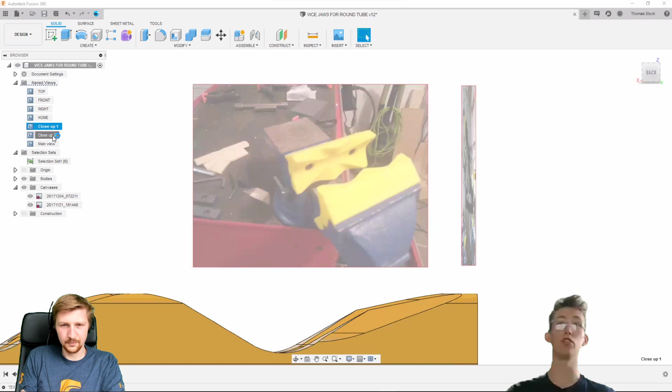The part I want to take you through the workflow with is this soft jaw that can be printed. It goes in some sort of clamp or vise, and is used to hold bike frames by a bike shop if they want to loosen bolts or make edits to the bike frame. What's great about printing jaws like this is you can print them quickly for a certain custom bike frame, or print them to hold many different bike frames. If you're worried the clamp itself might damage the bike frame, you can print these and it will hold it in a much better state, also stopping damage to the frame. So that's the part.

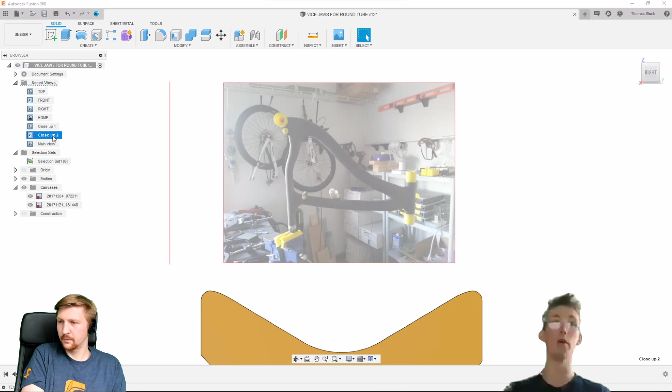I'll jump straight into it. I'll hide the canvases now that you know what the part is. To start the Fusion FFF workflow, we have to jump inside the manufacture workspace, so we go up to design and click manufacture, and now we're in the manufacture workspace.

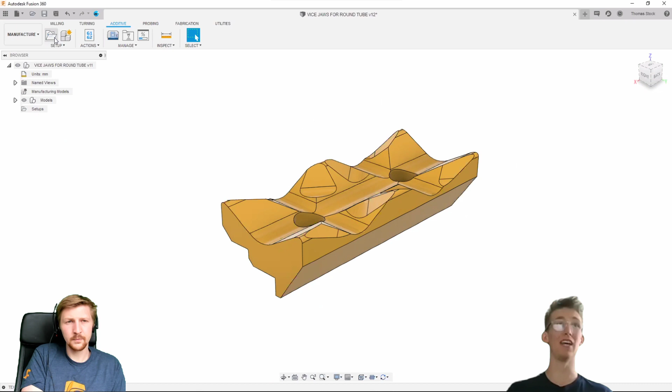The first step is always to create a setup, so we'll go to the top left and create a setup. This is important because in this setup we'll select a machine, and we'll be selecting our operation type, for example whether it's milling or additive. So we're going to select additive, go to our machine and click select. You can see within the Fusion 360 library we have a large range of machines.

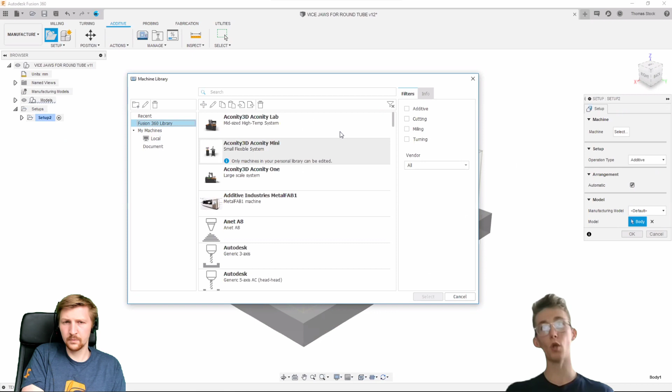We're going to set the filter to additive, and the machine we're going to use today is the Ultimaker 2 Extended.

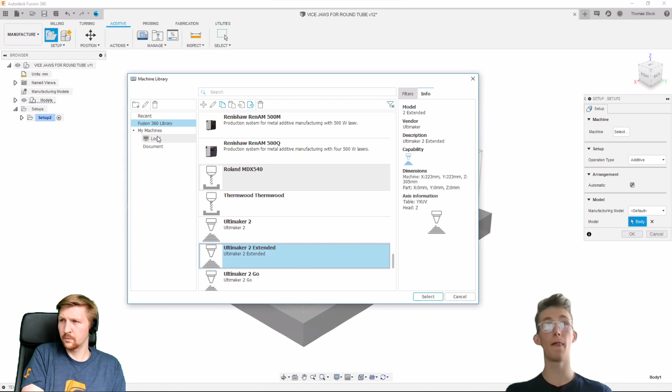We can do a couple of things with this. We can drag it to our local library, and now if we go in, you can see the machine there. Compared to another machine that's in there, we've not got a post associated with that machine, and we've not got print settings associated with it yet.

For those not familiar with what post is, it's short for post processor, and it converts your on-screen toolpath into machine-readable code. Every machine needs a post for it, and its post is unique to each machine.

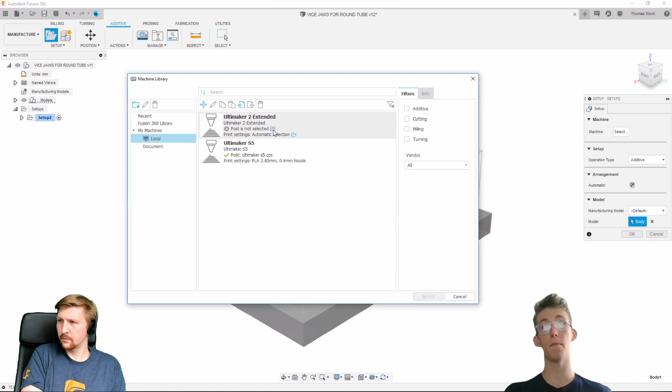So for this machine, we'll need to select post. We can click on the little folder icon here, and it'll take us to this window, and from here we can look at the Fusion 360 post library. Again, we'll set the filter to additive, and we'll select the Ultimaker 2 FFF machine post. Fantastic, so you can see we've got our Ultimaker 2 machine there with the post selected.

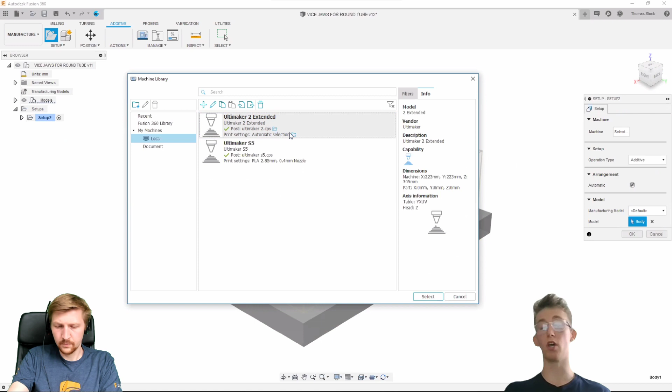We can also select print settings in the same way. I'll click select on there. As you can see, it's imported the build volume into the workspace, and it's selected the part and automatically selected print settings. What we're going to do is reselect some print settings that I've created for this job today.

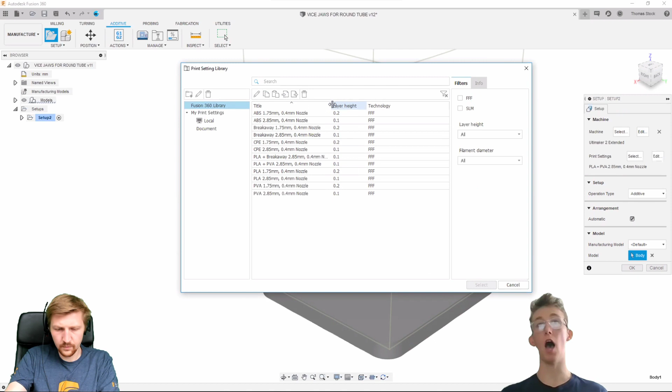We'll click select, and it'll bring up the Fusion 360 print setting library. What I'll actually do is go into my local library, where I've created these settings, called Tom settings. If we go back into the Fusion 360 library and select one of these print settings, you can see they're often sorted by material, filament diameter, nozzle diameter, and layer height. You can click on one and see the information associated with that print setting.

But anyway, we'll go back into our local library and select Tom settings, which is the one we want to use. Again, you can see the information for those settings here, and we can click select. Fantastic, so we've got our part, our machine, our post, and our print settings.

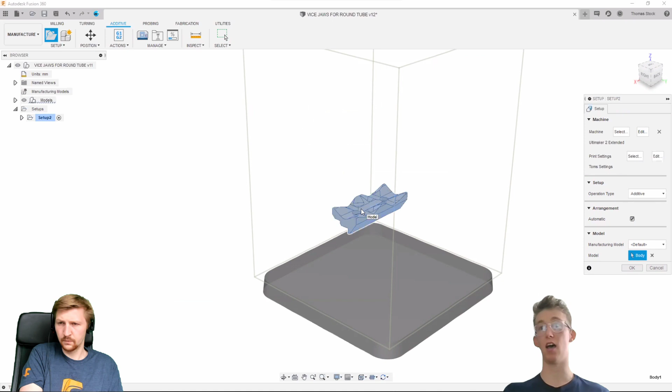We're now pretty much ready to click OK and finish with this setup. Note that we've got arrangement set to automatic and the body's already been selected, so when we click OK, it's going to move the body right to the center of the platform. And you can see that it's created the setup in the tree here.

The next stage is to look at this part and think about what position and orientation we're going to print it in. So we're going to go to the Position tab in the ribbon, where we see some of the options we've got: we can move the component, minimize the build height, use automatic orientation, which I'll show you, and also place parts on platform. We've also got collision detection for when we have multiple parts on a platform. So I'm going to show you guys automatic orientation today.

So there we go, it's opened a little dialog on the right here. The first thing we need to do is select our orientation target, which of course is our part. So I'll click on our part. We can see the critical angle is set to 45 degrees, which is standard for FFF technology.

It says support bottom surface - distance to platform, which of course we'll set to 0 because we want the part positioned right on the platform to ensure good first layer adhesion for a successful print. So smallest rotation, we'll leave at 45, and rotation axis arbitrary, that's fine.

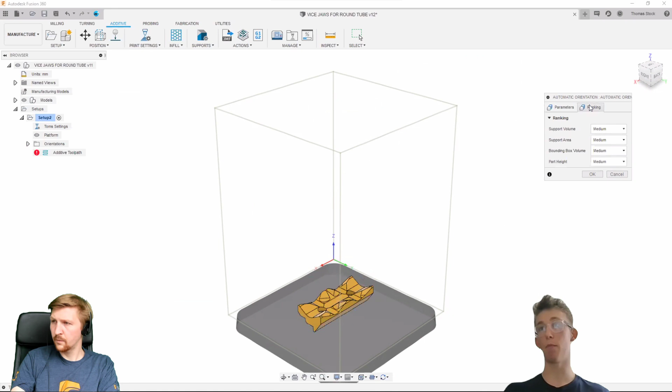We then go to this ranking tab, where we can see certain orientation parameters we can set different priorities on. This tool is going to generate a set of orientations for us. For example, if we wanted to set part height as a top priority for reduction, we can set this as very high, and so the orientations it suggests will overall have lower part height.

So Tom, why would I want a low part height? Yeah, good question.

For a lot of manufacturing processes, the part height is directly proportional to the overall build time. With FFF, it's less so, but if you wanted to save on material costs and build time, you'd want a low part height. We'll just leave all of those as medium and see what orientation results it generates for us. So I'm going to click OK.

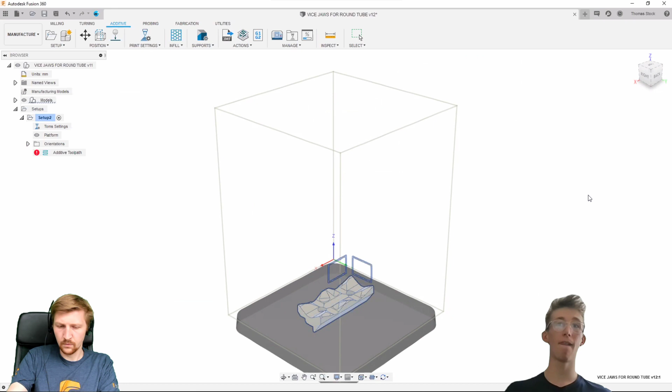You'll see on the left in the tree, it's created this automatic orientation folder. We're going to right click on it. We can always edit the settings we just entered, but we're going to go to orientation results and see what it suggests for us.

So you can see the rank. Initial is the position it's in at the moment, and we can go to any number of these. Let's go to number 10, for example, and it suggested a certain orientation. A lot of you will be looking at that thinking that's probably not the ideal orientation, and you're probably right. You've got different relative orientation settings with some values, which is also very useful. But what it usually does is put the best or most favorable orientations at the top.

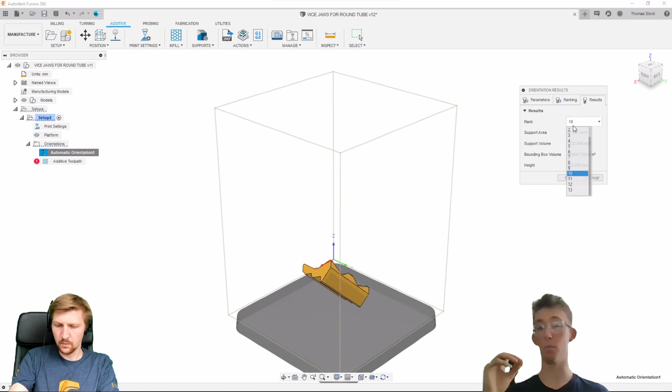So we'll just go to 6. Okay, that's looking a bit better. But if we go to 1, we can see that's probably the best orientation for this part. So yeah, I think we're happy with it. So we're going to click OK. Fantastic, so that's orientation done.

Next, we want to make changes to the print settings. So what we can do is go to the next icon in the ribbon, which is the print setting editor. We can click on that, or we have the option to click on...

I'll select some print settings within the setup. Give me one second for Fusion.

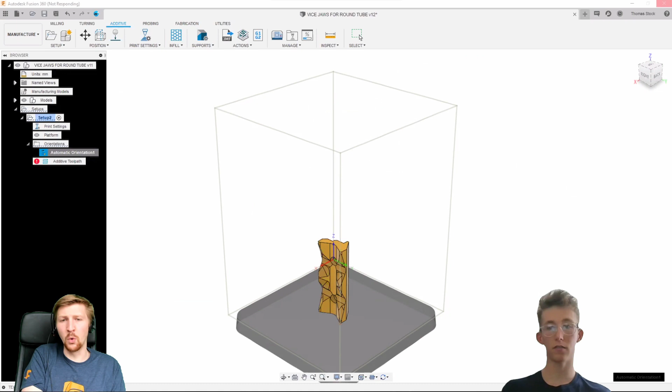So we've got some interesting questions in already here. Some people are asking what kind of printers. We've just been saying this is mainly for FFF, but what other types of 3D printers have we got? Because there are some other types, aren't there? Yeah, so at the moment we're just working with FFF printers. There are a lot of metal powder bed machines within Fusion as well, and also there's talk of bringing another type of additive machine into Fusion. But yeah, I'm just going to pass on to Richard for a second.

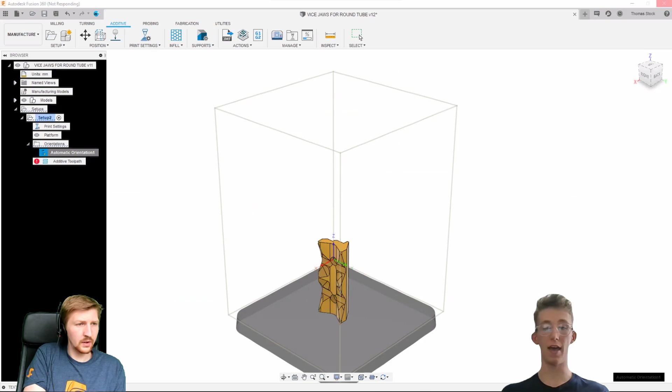Yeah, that's absolutely fine, stop the share. Cool, so just so everyone knows, Tom's having something he just needs to quickly sort out there. Yeah, so thanks for the questions everyone, we're just quickly sorting out. Tom's just sorting out what he needs to do on his end.

So yes, there are quite a few different types of printers at the moment. All we are talking about supporting is FFF, Fused Filament Fabrication. This is probably what a lot of you are used to. You have a spool of filament that gets fed through a set of rollers, pushed through a nozzle, and that starts making your part. We have talked about some powder bed machines as well, so Fusion can cope with powder bed machines. This is much more of your commercial type machines, for your industrial machines making components out of metal.

So how do those actually work with a powder bed? Is it a bed that's then laser sintered? Yeah, exactly, or melted. We have both in Fusion, and I've worked a bit with them myself and used Fusion to create and print parts. It's done a really good job.

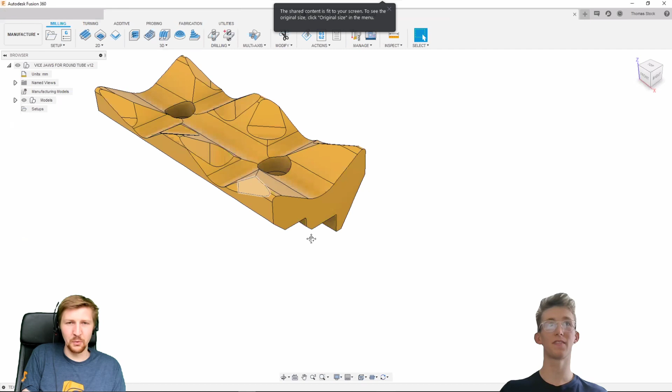So anyway, I'll just bring you guys back to where we are. Apologies for that, I'll just reshare my screen. No worries Tom, it's the whole point of us doing these things live. Not everything goes perfect, but everyone on the call does appreciate that. We're trying to do this in time, live with what everyone else is seeing, rather than spending a month doing a polished video.

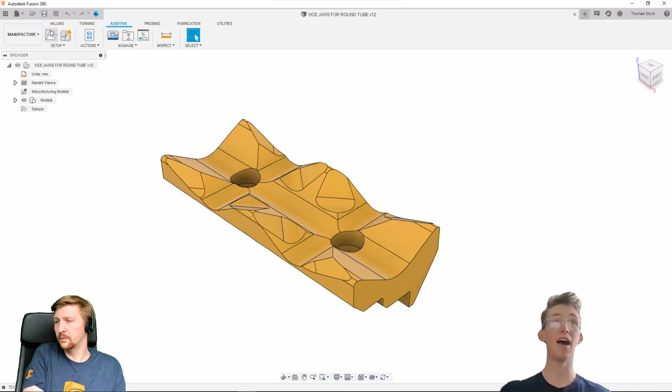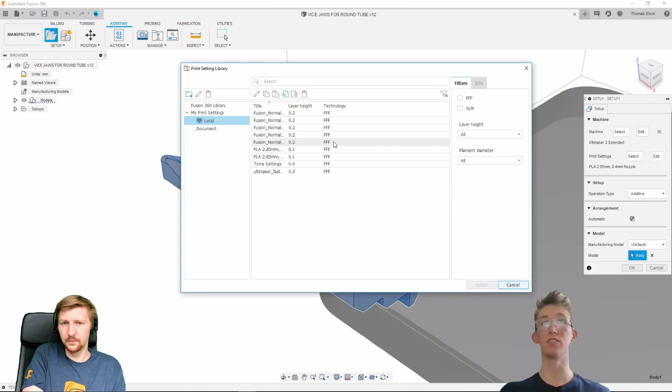Yeah, there were some questions about changing machines and changing posts, but we are going to cover that as we go on. There's a really cool add-in, or is it an app? It's a great add-in that I'll show you guys. You can download it. It was released about a week ago, and you can use it for creating your own post, but I can talk on that more later.

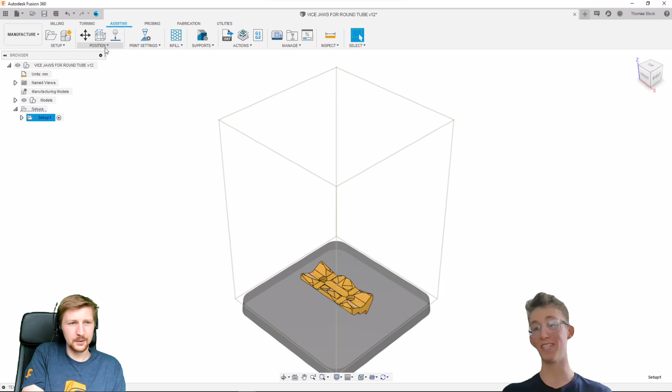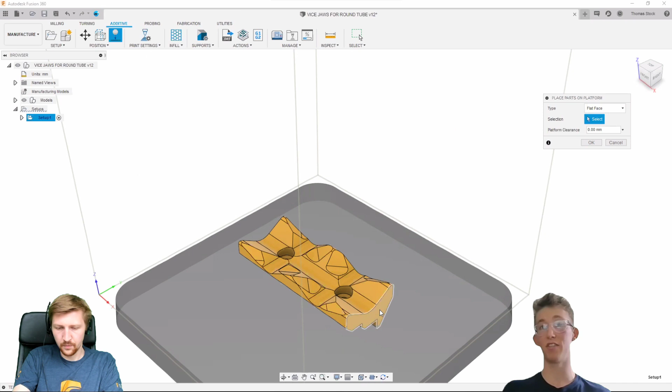So we're back, apologies for that. This gives me an opportunity to show you another different type of orientation for the part. So every cloud - I showed you the automatic orientation tool. One that I actually use quite a lot is this place parts on platform tool. Quite a few slicers have a similar tool. You can just select the part and select the platform clearance, or you have the option to select a particular face. So if I was looking at this part, I probably, and many of you as well, might not need an automatic orientation tool to suggest what orientation to use. So we can just select a face. Actually having run the orientation tool and it suggested this orientation was best, I'd agree with it. So there we go, it's positioned the part.

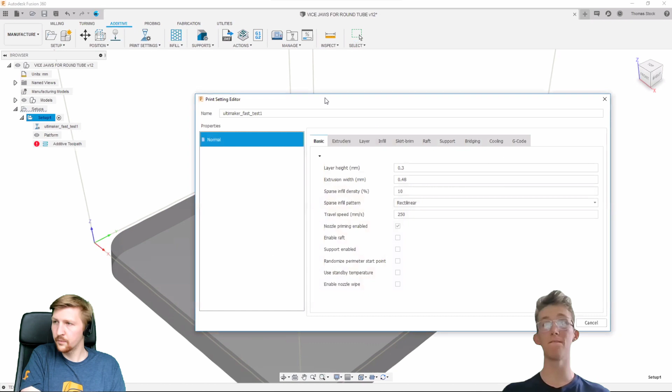Now we can jump back in right where we were before. We've got our print setup here, our print settings. We've selected our machine, so we can go to the print settings editor, and we can see that we've got a range of tabs, and under each tab we've got different print settings. We've got a basic tab - this is kind of for people who may be new to FFF, and we've put print settings that we saw as key or most useful for those people into one tab. We've also got an extruders tab, a layer tab, an infill tab, etc. Each of these have a range of different settings underneath that allow you to customize how you want your part to be printed.

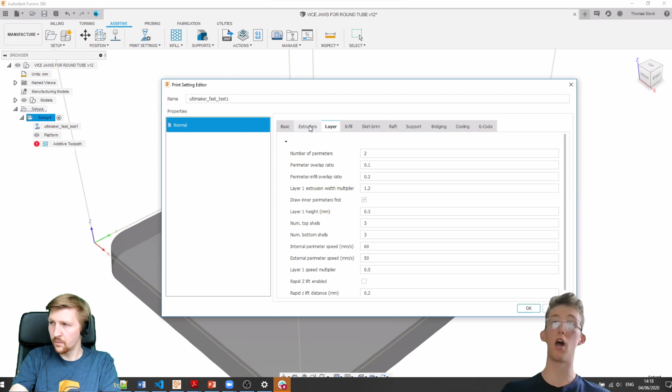So we go to raft, support. Of course, we're using a dual extrusion machine with the Ultimaker 2. We can select this support extruder ID for extruder 2, telling it that we want to use extruder 2 as the support material, but for this case we'll just use extruder 1. You can see the range of settings. Is there anything I'd want to change about this build? I think no, I think we'll keep it as that. So I'll click OK. I will enable support - we've got those holes for attachment to the device, and when those holes are printed I'll probably need a little bit of support. So I'll click OK.

Fantastic. So you can see on the left in the tree, setup, print setting selected. We can hide our platform if we want, and now we can see that our additive toolpath is ready to be generated - it says there's no toolpath yet. So we can either generate it from the tree, or we can go up to actions and click generate. It shouldn't take too long, being a relatively simple part.

So we've selected the machine, selected the post, selected the print settings, made edits to the print settings. We've chosen the orientation, we've made edits. We've made sure that we're using support for those holes, and now we're generating the toolpath, and we see that it's just finished. So brilliant, we've generated a toolpath.

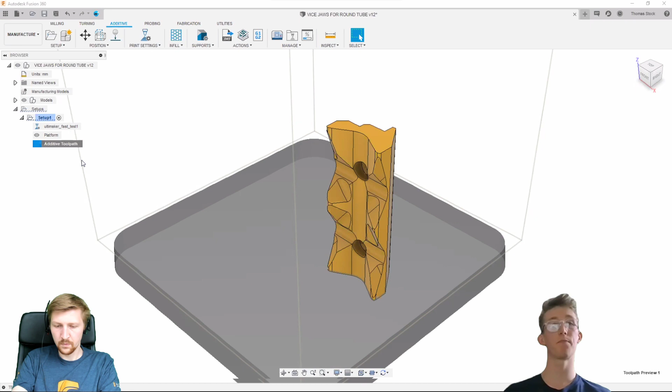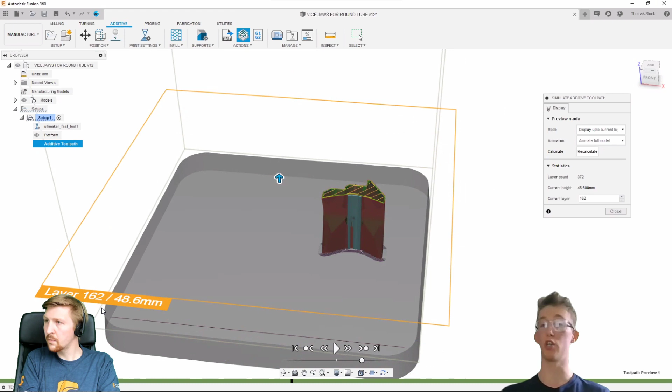We can now go in and simulate it. Just give it a second for the simulation to open up. Fantastic, so here we go - you can see that it's the first layer, and what we can do is drag this little arrow and move up through the part to see the toolpath simulation. You can see on the bottom left this orange square which shows the layer, and you've got the layer and the part height as well. So we can zoom in and see the toolpath.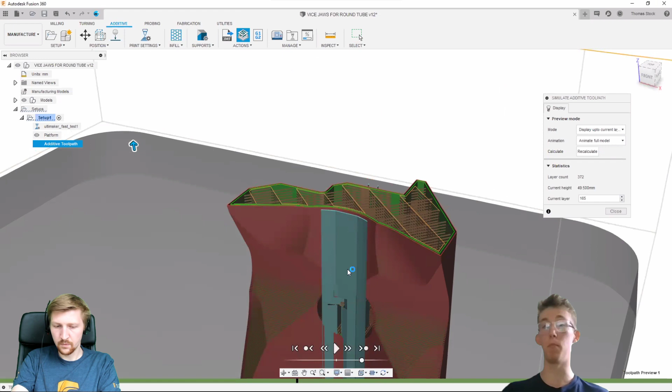You can see that the way this has been color coded: the outer perimeter is red, the inner perimeters are green, and the infill is orange. You can also notice that the support material is shown in blue. So we can move up through the part, and you can see actually that for these bolt holes, it's actually going to need to use quite a bit of support. And then you can see the top layer there.

If we wanted to, we could just display the current layer and zoom in on that, for example, and check everything's looking okay. We can also click animate layer only to play through it. I'm just going to slow it down so we can play through that layer. Okay, it's done it very quickly.

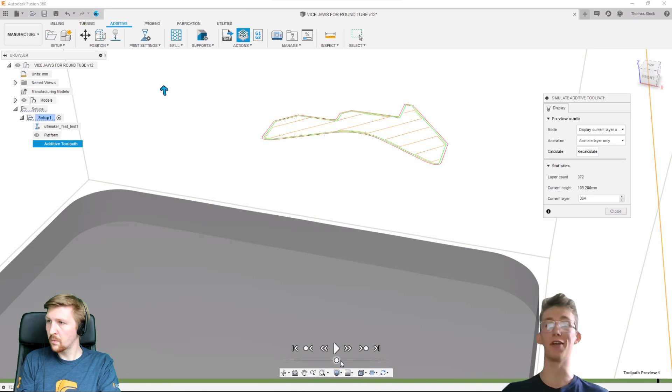So let's play through that again a bit slower. There we go, fantastic. So if we want to see exactly how it's going to print that layer, we can do that via the simulation tool here. I think we're all happy with that.

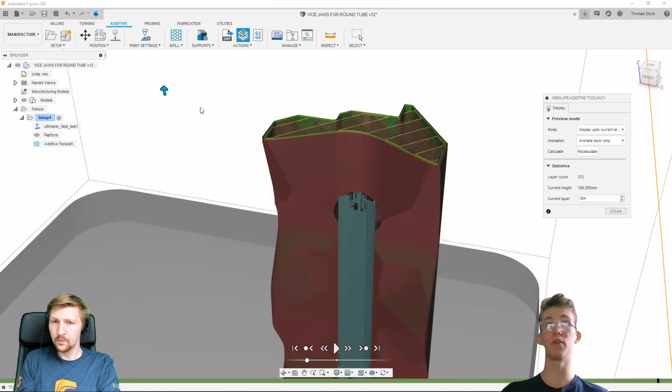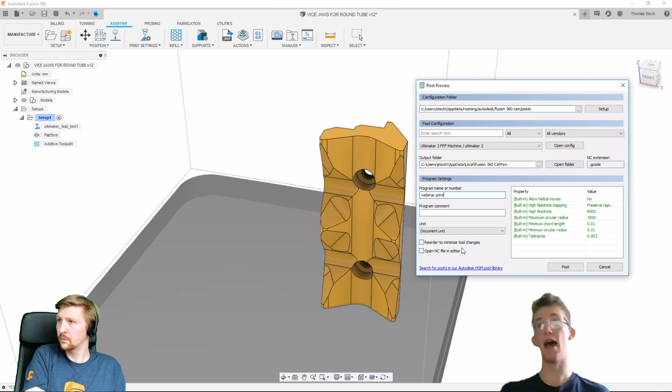So we're going to click close. Now the next step is to post-process our toolpath. Again, we can go to actions and click post-process. You can see the post configuration is already selected, since we chose that during setup. We can go down to program name or number, so we're going to call this webinar print today, and click post. We'll open the desktop or another folder, save it to our desktop, and click save.

Okay, so assuming that's processed, I'll open it for you guys. Just while that's opening, Tom, an interesting one that I've never heard of before.

Someone's asked about a Delta Wasp machine with a clay extruder. Have you ever heard of one of those before? I've heard of the Delta machine. There's four main types of 3D printing machines, or FFF machines: you've got Cartesian, which is the one we're looking at now, the usual Cartesian axis machine; you've got your Delta; and you've got your robotic arm, or Scara as it's called, and Polar might be to do with the robotic arm too. I haven't come across that exact printer, but a project my team actually worked on was also clay printing and clay milling. We did this with Kolb, using a robotic arm. Didn't use a Delta printer, but that's very interesting.

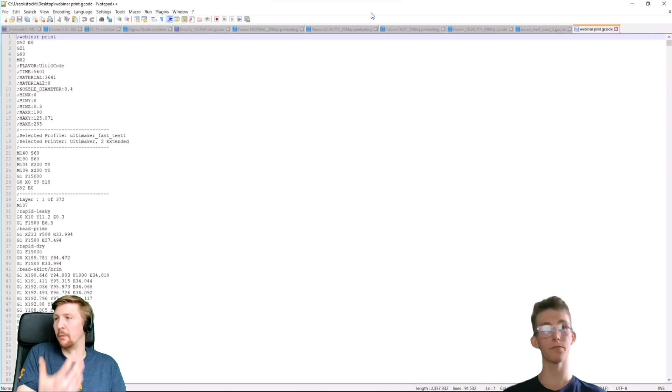Okay, so the Delta stuff isn't supported in what we've currently got. No, but it's good to know - I like to be quite honest about what we can and can't do. But everyone, bear in mind all the feedback you post. Me and Tom speak to the product managers quite a lot, so these things will come up. Oh yeah, we've had a couple of people ask for that. So please let us know what you want to see.

One thing I'll just give you a heads up on, Tom - someone's asked, he's got a local printer and he's asking how he can add that. Is that something we can have a quick look at before this is out? Yeah, sure, I guess he means he's got his own machine and wants to add that to Fusion. That's brilliant - we're going to touch on that at the end of this presentation.

And my last interruption, I promise - someone's asked, is it possible to do tree supports? Good question. So in the FFF workspace, no. The control you have over supports at the moment is quite limited. You've got the standard FFF support and you can change certain parameters, but it's got a set shape and you haven't got much control compared to other slicers over the support structure. There is tree support within Fusion, but with the metal powder bed, not with the FFF side, so we've just got standard automatic generated support.

Brilliant, Tom, superb answer there, really appreciate you going off topic for that. Thanks for the question, guys. I'll crack on. So as you can see, we generated our G-code - I won't go through this because it's not particularly interesting. But what we can do now is save that to a USB, put it into our printer, and print. Now, assuming we print this part and realize the prototype printed awfully because of these holes, and you want to remove these holes and reprint the part - well, this is what's great about Fusion.

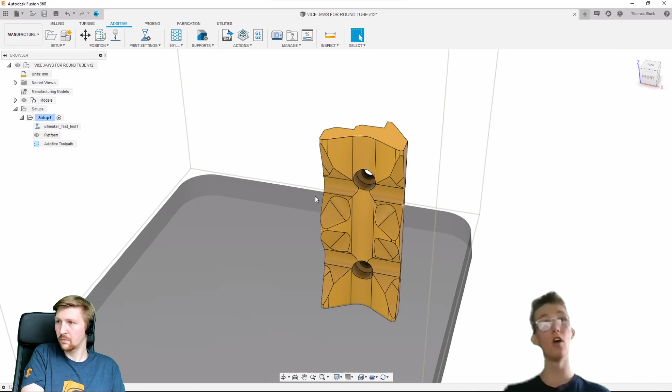So what we can do, we can just go back in the Design Workspace, see a part. We can just select these holes, click delete. Okay, the hole's been deleted from the part.

You go back into the manufacturing workspace, and all we have to do is just regenerate the toolpath. So we've made a pretty substantial design change to this part, and we don't have to do any more setup. We don't have to reselect the print settings or change them in any way, reselect the machine or the post, or even the orientation. It's all kind of been saved, and as you can see, the toolpath is generated.

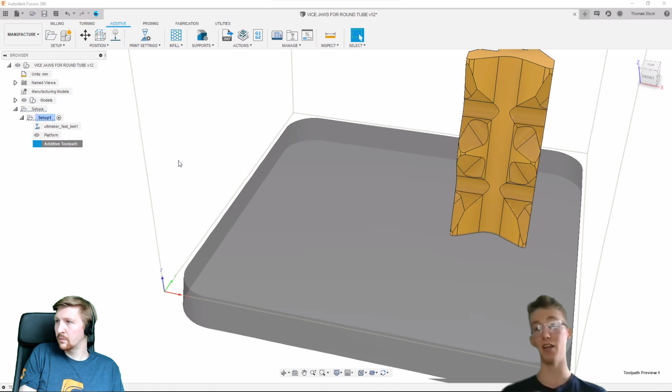And we can go and simulate it. So it's extremely great jumping from design to manufacturing workspace to make these little changes. And that's a really good point to make, Tom, because someone earlier asked why would they use this over another slicer.

I sort of explained that yes, we might not have all the settings that, for example, Cura has, but the fact you haven't got to keep exporting and importing files means you don't lose all that history. As soon as you start a new project in another slicer, you lose all your settings. So this is why the Fusion workflow is actually really nice to use.

Yeah, exactly. I mean, Cura is a very powerful tool, but it doesn't quite allow you to do the things that Fusion does, of course, because Fusion is a modeling package. Yeah, it's a whole package, exactly.

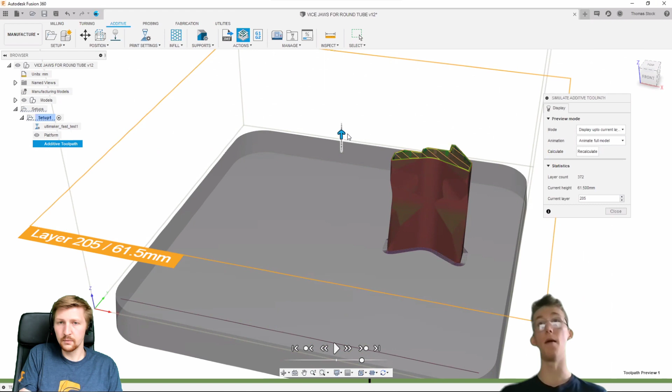So fantastic, yeah, here we go. We can now simulate the new toolpath. Our holes, of course, have been removed. We no longer need support for any of these areas because it's just a straight up extrusion part. And now our part is a lot more likely to print.

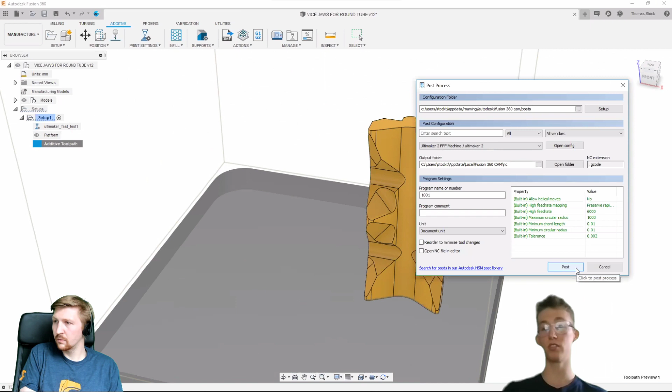So that's fantastic. We can click close, and of course we can right click, post process, and repost. I'll do this for you actually, and repost and replace the G-code. So I'm guessing you would rather do a design mod to get rid of supports.

Yeah, it's interesting because you could have printed this part without supports, and I'm sure the holes would have printed, but it would have had a little bit of difficulty because it is an overhang, and maybe that just would have caused other issues with the print. This is just an example, but maybe there's other parts people print where they want to make a quick design change and get rid of a certain feature, and it's so quick to do, which is just a great thing with Fusion.

That's good, because I've done a little bit of 3D printing, and what the people who taught me said was use supports as a last case scenario. If you can orientate or design it so it doesn't need supports, that should be your first go-to. Exactly, supports is like the last case scenario.

Yeah, exactly. And that's in a way what's actually really powerful about this. If you've got a part and you're not sure what the best orientation is, this orientation module—if you go to the ranking and set support volume to very high, that means it will really look at orientations that reduce the need for support, which of course is what we want.

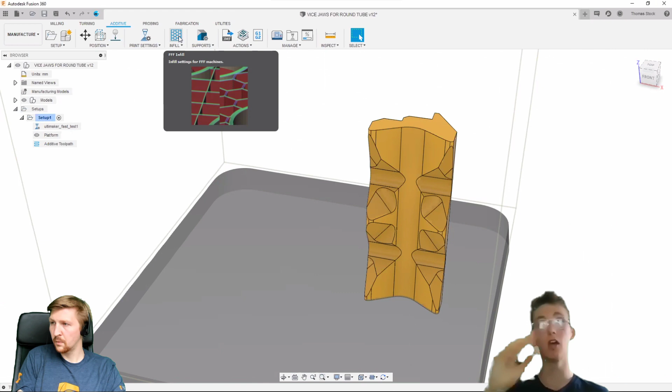We can go into this supports icon in the ribbon, and you can see it directly links you to the support settings. So you don't have to go to the full print settings and go to the supports tab if you just want to change something as simple as enabling supports or not. And of course, if you wanted to go into the print settings, you can click on the little icon here and it'll take you into them.

And that is the same for infill. If you just want to make a quick change to infill, just click on the little icon and it's the same again. The reason we put these two in is because they're quite common changes people like to make. You usually select a set of print settings with the correct material, correct layer height, etc. Then sometimes people like to reduce the support, change whether they use support or not, or select which infill they're using. Then you can just do those quick changes without jumping into the full print settings editor. So yeah, there we go.

Fantastic. So actually jumping back to the question earlier, which was about creating a custom machine, I believe. Yeah, we're going to jump onto that now.

So if we just minimize that setup, what we're going to do is create a new setup, and I'll show you guys the workflow for creating a custom machine and also a custom post using the FFF post creation utility tool that you mentioned earlier, Richard.

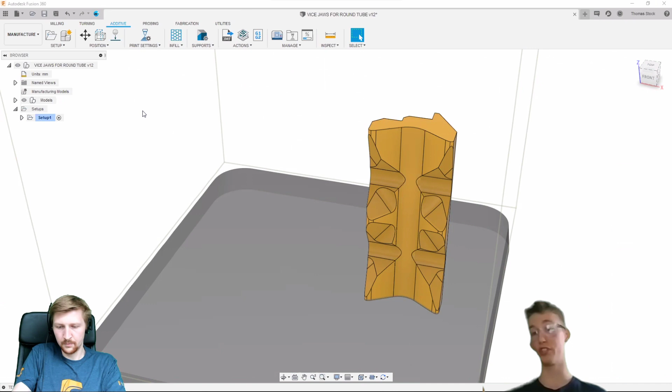So what we'll do is start by creating a new setup again. Go into the setup icon in the ribbon, and as before, we're creating a new setup. We're going to set the setup type to additive, telling it we want to print this part additively. Now we're going to select the machine, so we click select. You've probably noticed you've got a couple of icons here, so what we can do is click on them.

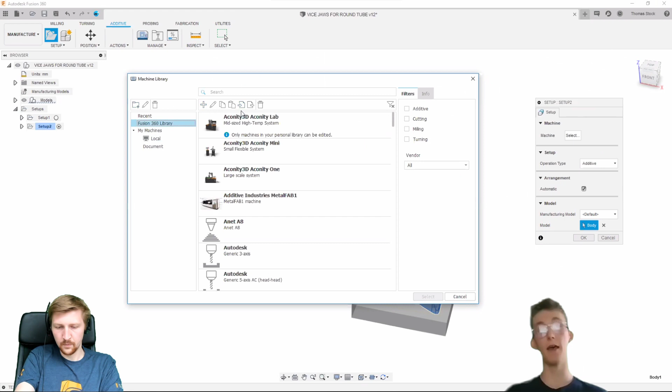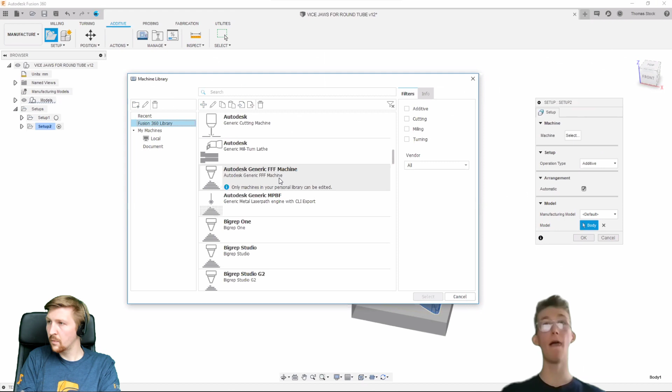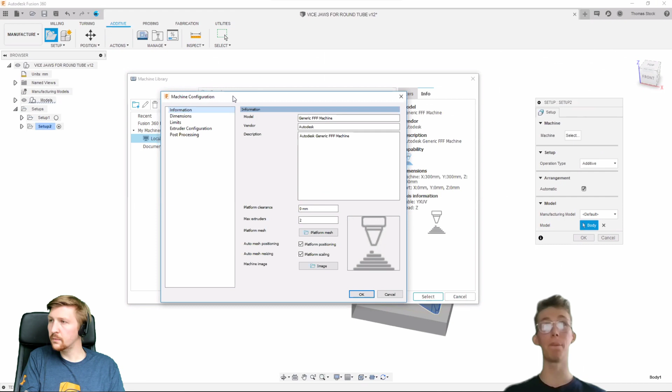So we can scroll down, for example, and see this Autodesk generic FFF machine. We go to our local library, and we have the option to create a new machine. I think it's just called 'create a new machine,' and we can click to create a new additive machine. This will bring up the Autodesk generic FFF machine settings. So you can either create your new machine by clicking additive here, or within the Fusion 360 library, as we did before, get this Autodesk generic FFF machine, drag it to our local library, and simply edit this machine. We click it and click edit selected machine - clicking the plus icon or clicking edit on this machine brings up the exact same window, the machine configuration window for the generic FFF machine. Here we can enter our own machine name, so I'm going to call this Tom's machine.

Vendor, I'll just put none, for example. Platform clearance, so yeah, we'll leave these as is at the moment.

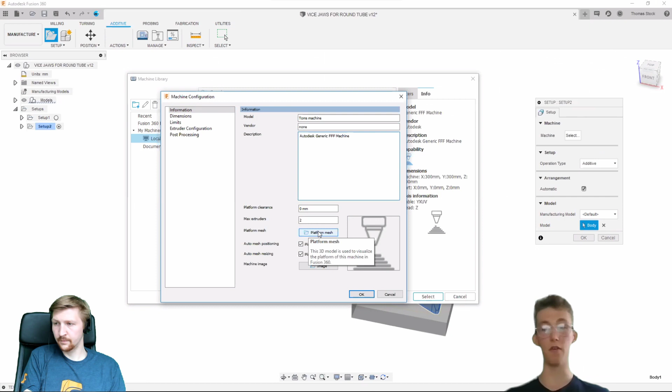Note, for those who want to add, the platform bed is often just shown as a big grey rectangle surface. What this actually enables you to do is upload a file, such as a 3MF file, which represents your bed, so if you want a visual representation of what your bed looks like, you can upload it here. When you see your part in your machine in the workspace, you can actually see the shape or decal or whatever on the bed, so it just makes it a little more personal. But we're just going to leave that as it is today.

So we can go to the other tabs and work down. Dimensions, so you've got your bed offsets and your bed size. I'm just going to leave these here. In the video I change a few of these, but for today I'll just leave everything as mostly default.

Note that some of the limits, like max bed temp, is set quite high. Obviously this is an unrealistic bed temperature, but the reason it's set high is so it doesn't limit your print settings. Because if this was set to something like 60, and you need to print a certain part with a bed temperature of 80 or even 100 - I know ABS often needs a bed temperature of 80 or so - we've set this high just so your parts aren't limited by this value.

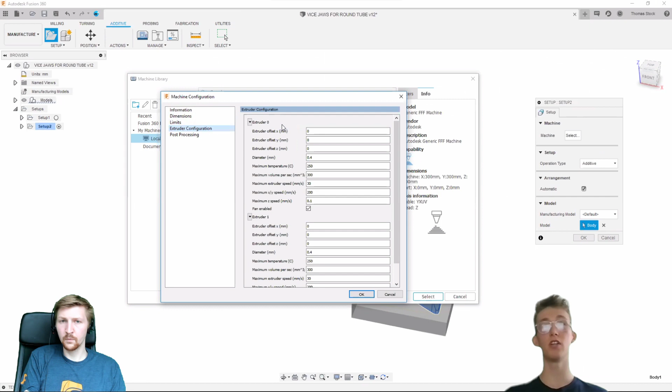So yeah, we're going to go through the configuration. Again, we'll just leave all of this standard, just changing the name for simplicity. And we go to the post processing tab.

So obviously we've created our own machine, so it has different dimensions and different setups. And of course we'll need a post for that machine. At the moment you can select all the posts that are currently available in Fusion 360, but what we need is a custom post.

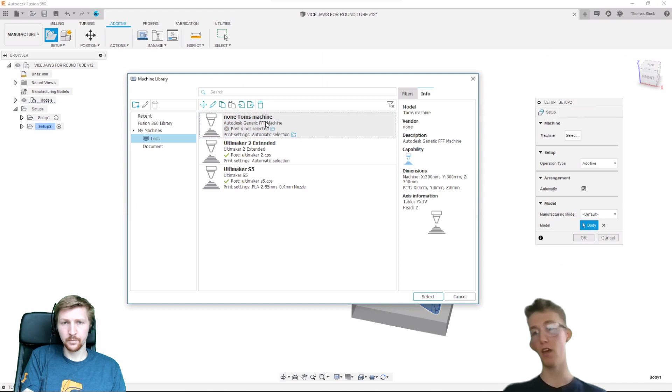So what I'm going to do is click OK on that machine. You can see the vendor's none, and Tom's machine's been created there, and it says post not selected. That's fine - all I'm going to do is click select and just click OK.

And so you've got setup 2, so we've got a machine that we just created. Of course, if you change those values, the print bed would have updated - there'll be different sizes. We need to now create a post for that machine.

So what we're going to do is, we're still in the manufacture workspace, go to utilities, go to the manage tab in the ribbon, and go to FFF Post Creation Utility. I'm going to click on that.

You can download this from the Autodesk App Store. We could put a link in the description of this video, or in the video getting released today or tomorrow, with a link to this app in the App Store so you can download it from there. Once you've opened it, you get this dialog on the right, and you can see you've got a couple of options: you can load a post, or you can create your own post.

So that's what we're going to do - create a new machine, create a new post. I'm just going to put this post name as Tom's post. Post description, I'll just leave it as is. File extension, you can put this to NC or whatever, but we'll keep this as G code. And you can go to your basic settings.

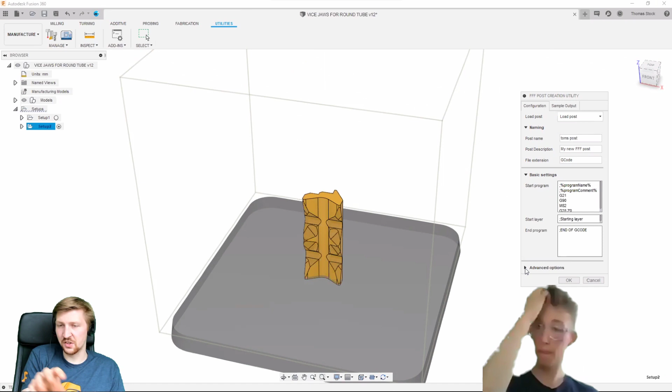That's really good, Tom, because someone earlier asked how to stop it going to Z0 at the very start. So I'm guessing they just edit that start program and either change the Z0 value or take it out altogether.

This is an easy way to do it. Obviously, for those comfortable with creating or editing their own posts, they can do that in JavaScript or something like that. But for those who may not be so comfortable, or the concept of posts is quite new to them, this is the ideal way to start with editing and creating posts.

So what we'll do is hide those, and I'll show you what this sample output tab does. We named this Tom's post, and we can add a little comment at the end here - I'm just going to do, say, webinar test.

So we're going to add a little comment there, then go to sample output. This is quite neat - it shows you an example of the G code that's going to be generated with this post, so you can visually check it. And there you go - you can see a little simple change that we've made.

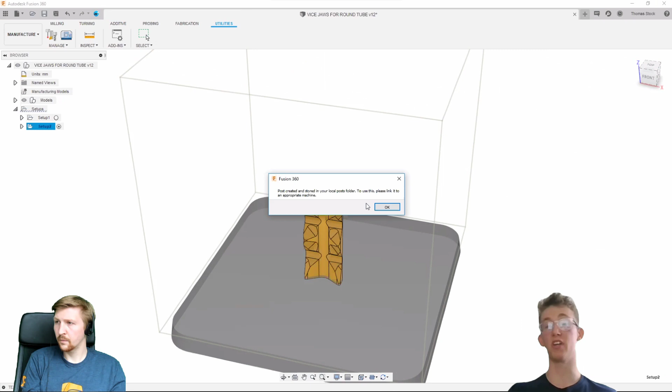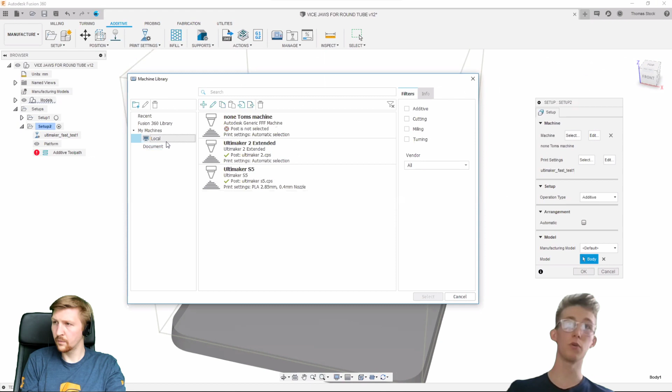Now we're going to go back into our setup 2, because remember we created a machine but had not added a post to it yet. So we'll go back into setup, edit, and if we click select on the machine, go to our local - there we go, Tom's machine, post not selected. We click select post, remember it's saved in our local post library, so we go to my post, local, and there's Tom's post.

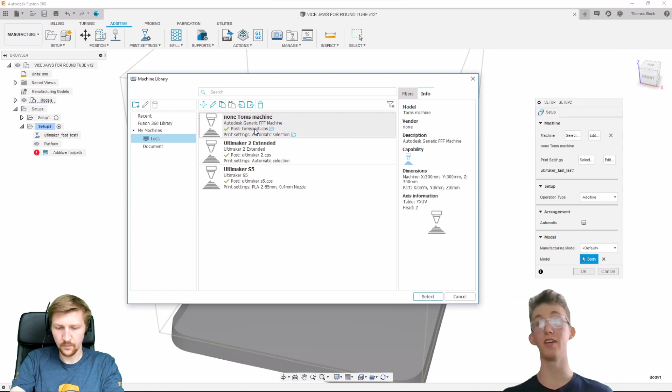So let's click on that, click select, and it's assigned that post to our new machine. Print settings have been automatically selected - that's fine. If we wanted to we can select them from here, but I'm happy with the ones selected, so we just click OK.

Then we can make changes to our print settings if we wanted to, and you could still run now the same workflow I've just shown you. Now note, say for some reason you printed your part and there's been an issue, or an issue with the G code generating - what you can do is go back and edit the post very easily. I'll show you that.

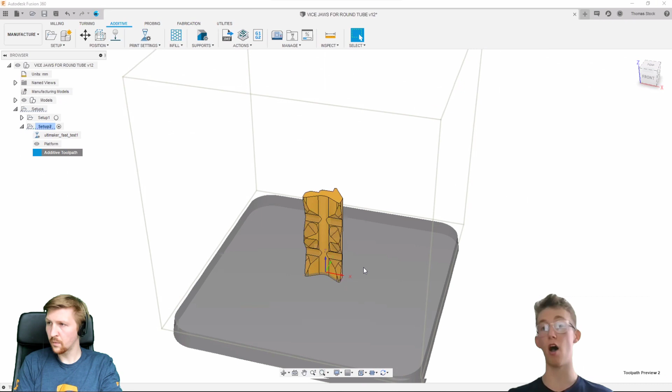So we've run it, and it's generated the toolpath fine. I don't know, say for some reason when simulating, or when you try to generate G code, or when you print your part, there's an issue - we can go back and edit the post, and I'll show you that now.

So we're going to go back, staying within the manufacture workspace, back to utilities, back to the manage tab in the ribbon, back to the FFF post creation utility. What we're going to do differently this time is click on load post and click Tom's post. The only posts you can load here are custom ones in your local folder, so if you'd moved other posts to your local folder, you'd be able to access them here.

Then if you wanted to, you can make your changes, and clicking OK would again save it and tell you it's saved in your local post folder. We've made no changes, and our toolpath generated. We simulated it, so now we can post process - there we go, you can see our post has been selected.

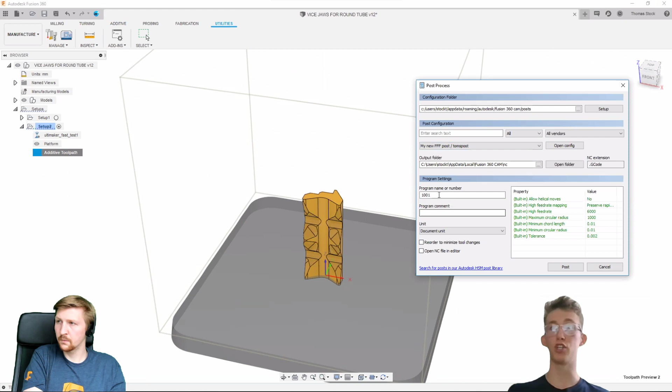You can add your name there, or we can add our name here. I'm going to call this webinar test. What did I call it last time? Test 2. I'm not very inventive with names, so I apologize. You need to get a lot better at that, Tom. Yeah, that's one thing I need to improve.

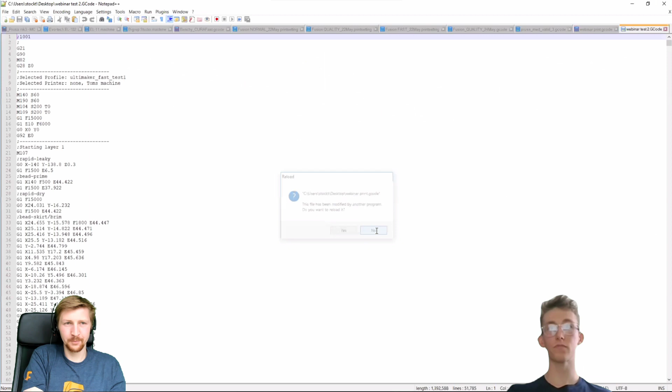So I'm going to save that. That's going to pop up on my desktop. I'm going to open this for you guys and show you. I'll click no on that. So here we go, webinar test 2.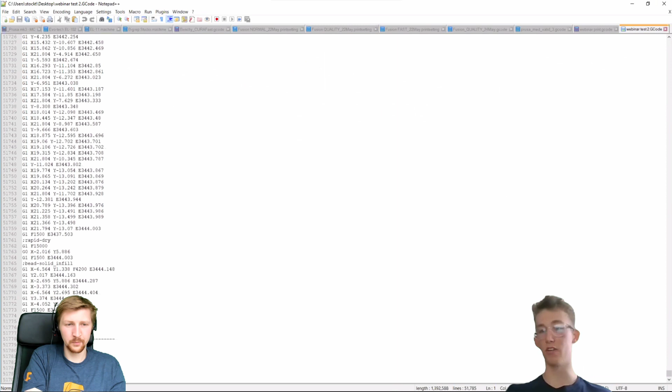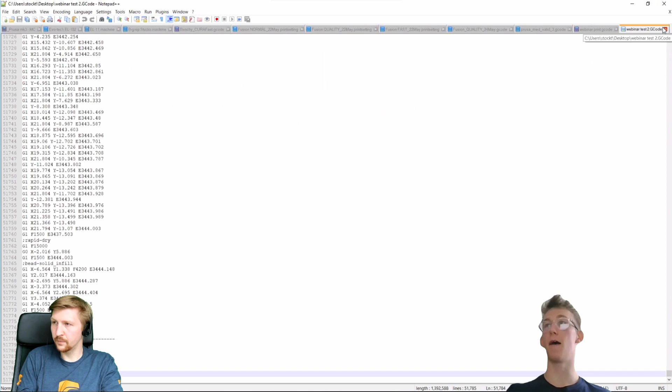You can see, yeah, it's exactly what we expect. It's not a particularly interesting change, but it's an obvious visual change for you guys. You've got that little comment we added on that post at the bottom there, webinar test. So that's an introduction to how to create your own machine and your own post in Fusion. As I've said a few times now, look out for a video popping up on YouTube in the next couple of days, or maybe even later today, a polished video on this. So I think that's all I've got to show you guys today.

If you've got any questions, fire them away. I'm here. Yeah, there's some interesting ones. Rather than me typing the reply to Simon.

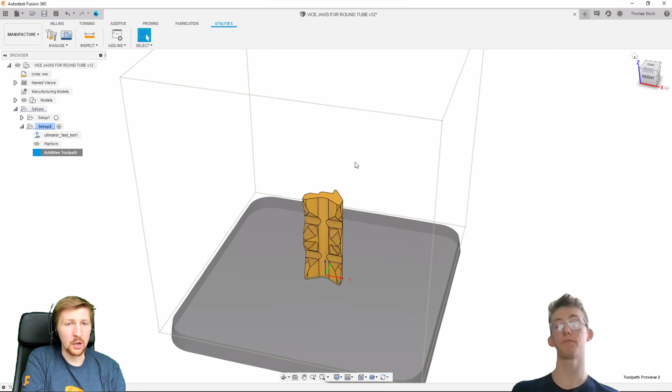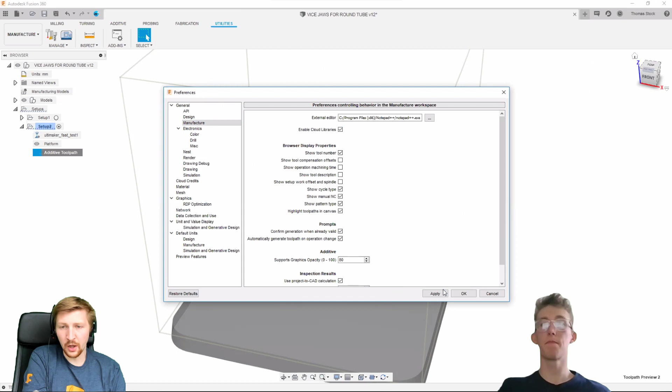Someone's asked about having posts so anyone in the company can use them. What you need to do is click on your name in the top right, go to Preferences, and then it's called Enable Cloud Libraries. What that's going to do is bring up an Assets folder in your data panel. I don't think it's a preview, it's just one of the normal ones. Is it in Manufacture, I think? If you go up like 2 or 3 down. Oh yeah, fantastic, Manufacture, Enable Cloud Libraries. So you enable that, hit OK, and then open up your data panel on the left - that's where all of Tom's weird thingy prints come up. If you go to Home in your data panel, you'll now see the library assets there. If you click on that, you'll see all these assets come up, including CAM posts - that's where you can put your posts, and then anyone in the Fusion team can access that. So again, not just for 3D printing and FFF, it's brilliant for most subtractive ones too, because you can also share the tool libraries. You've also got CAM machines, so you can put your machine libraries on there as well. Brilliant question, thanks for that, Simon.

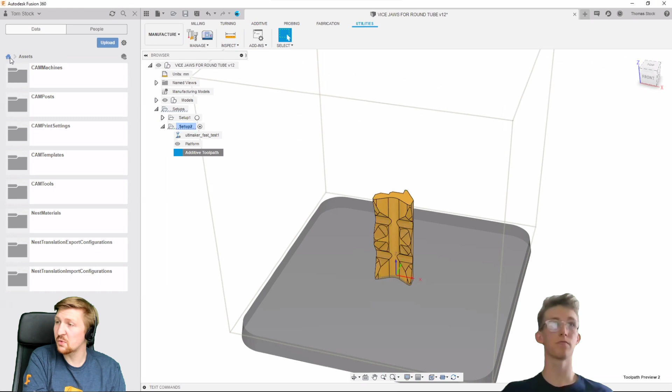Otherwise, I think we've pretty much answered most questions. There's a lot of questions about problems people are having with the posts and little tweaks - please put stuff on the forum. I'm hoping we can help the majority of people out here solve any problems. Of course, there are some things we might just physically not be able to do in the post, but we'll do our best to try and do so.